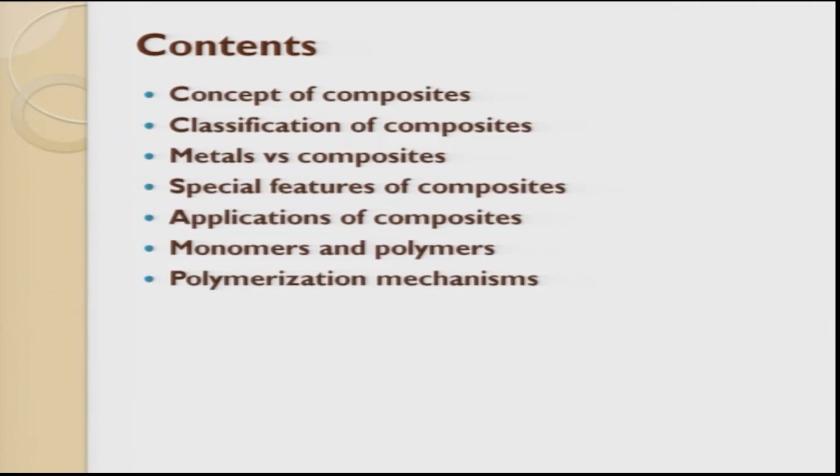So in today's lecture, what we are trying to cover is the concept of composites, then we will talk about classifications of composites, then the advantage of composites as compared to metals, special features of composites, applications of composites. Then we take exclusively polymer matrix composites, and we will talk about what is monomer, what is polymer, and the different mechanisms by which polymerization can happen.

So what is composite? Though composite is a term used for almost a century, still a clear definition has not been evolved. So based on my understanding and the literature available, I have put a very broad sense of definition of composites.

So in a broad sense, the term composite materials refers to a solid matter composed of more than one component, wherein those components are in separate phases.

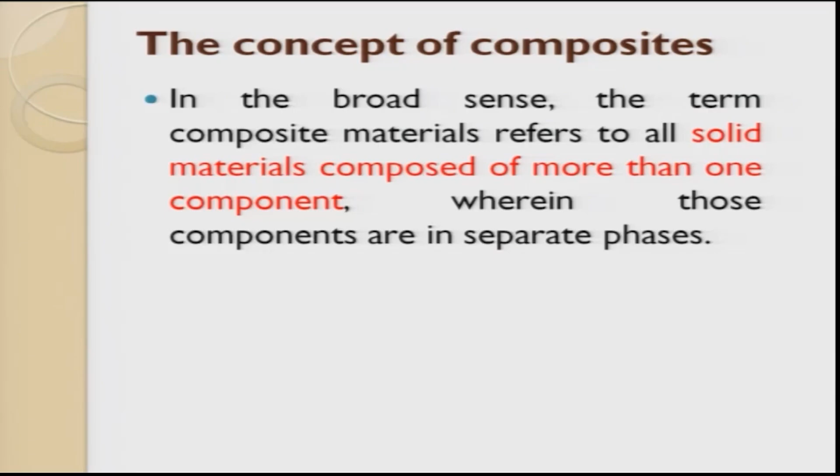So for example, I take material A and material B. When I mix these two and do a process, that means I apply pressure, temperature with respect to time, then I get a product out. This product will always be a synergy, meaning it will try to take the advantages of A, advantages of B, and give a new product which has the required material property.

And when I take the cross section of the composite material, I can still distinguish what component A is added and what component B is added. So this is a definition for composites. The component A is called the matrix and component B is called the reinforcement.

So there is a difference between composite and alloy. In an alloy, when I mix material A plus material B, it forms a product C. The product C formed will have a better property as per the customer's requirement, but when I take a cross section, I will not be individually able to detect the presence of material A and B. So this is the difference between composite and alloy.

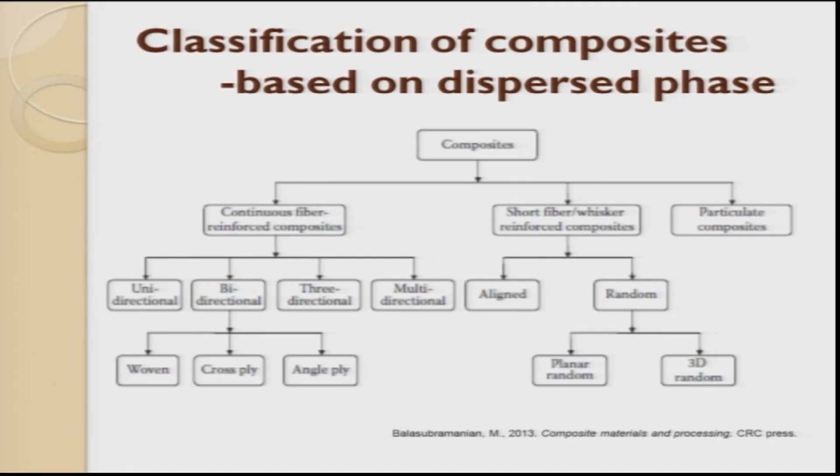When we go ahead with the continuous fiber reinforced composite, again you have unidirectional and bidirectional. Unidirectional means all the fibers running in one direction length. Bidirectional means it is woven like your cloth, a shirt what we wear. So you have fibers running in both directions. You can also have fibers running in a third direction.

These composites are now getting into the market and have very high strength, and these composites are called 3D composites. The fiber runs in all three directions so that you get X, Y and Z thickness also. Then you can also have multi-directional.

When you talk about short fibers, it can be aligned in one direction or it can be random in nature. When you go to bidirection, we call it as woven, and there is also a classification called cross ply. You can also have angle ply. Angle ply are these textile-like materials cut in different directions and they are laid.

We will see more in detail when we talk about composite laminates and other places. As far as random is concerned, it can be planar random or it can be 3D random.

When I talk about composites based on matrix classification, there are three types. One is called polymer matrix composite, which is very predominantly used in mankind today. The next one is metal matrix composite. Metal matrix composites are used wherein there is need for high strength materials and other properties like stiffness and corrosion resistance. All these things we are now trying to add to metal matrix composites.

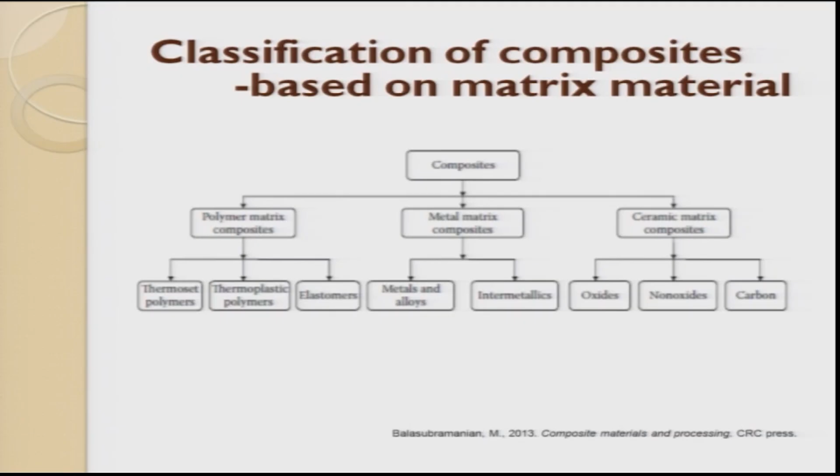When you talk about ceramics, there are three classifications: oxide ceramics, non-oxide ceramics, and carbon. When you talk about oxides, alumina and SiO2 are some examples. Here these ceramics are bonded together and sintered along with the reinforcement to get a toughness property. For non-oxides, examples are SiC, CBN, and WC, tungsten carbide.

And the last one is carbon, which is used as the matrix in which reinforcement happens. A very good example of carbon-carbon composite is used in radomes, which are in the front nose cone of a plane, where there is a huge amount of temperature, pressure, and friction as it comes down from very high altitudes to the ground level.

So this is the classification of composites based on matrix. First I talked about the dispersion phase, then I talked about the matrix phase. Now let us see some of the properties of composites when compared to metal.

I take only two metals, since these two are commonly used: steel and aluminium. If you see weight-wise, steel has a very high density, followed by aluminium. So aluminium is nowadays getting replaced wherever steel was used. Second, aluminium has the advantage of corrosion resistance. So aluminium is now playing a major role.

Now when we move towards composites, it is much lighter than even aluminium. So if you have a moving body and want better efficiency or mileage, then we replace that aluminium also with composite materials.

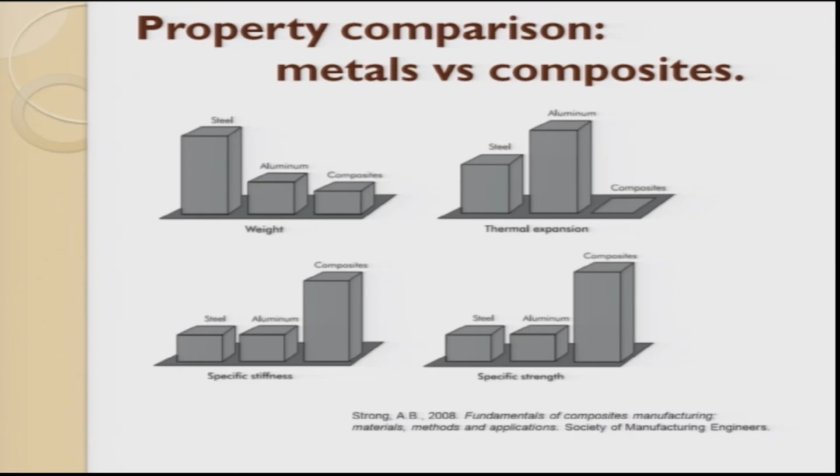With this, let us move further and see what are the special features of composites. Composite materials have high specific stiffness. What is high specific stiffness? Stiffness to density ratio, that is, stiffness divided by density. This gives an advantage in seeing what weight I have to add to get the required stiffness. The next one is with respect to strength.

Stiffness and strength are two different properties. Please make a note, people interchange these unknowingly. Stiffness is different, strength is different. Stiffness is taken in the elastic zone, while strength we always take as the ultimate strength.

The next one is that composites are materials which can be made up to near net shape. Today in manufacturing, the entire manufacturing domain or regime is moving towards near net shape machining or near net shape part making.

One example is rapid manufacturing or rapid prototyping, wherein the prototype or product is made exactly to the near net shape, and we do a final secondary operation, either painting or a finishing operation, such that we can directly take it to the market.

Near net shape is one of the biggest advantages of composites, and on top of it, composites give a wonderful property of getting integrated along with other parts. So the capability of part integration is very easy and good with composite materials.

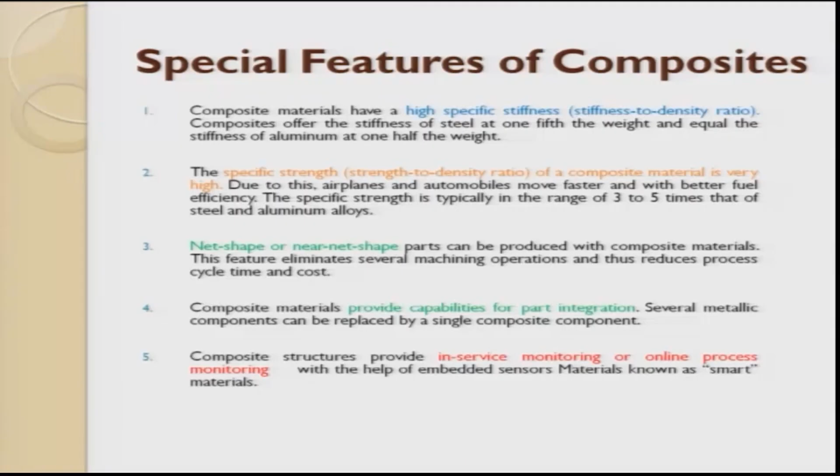The latest advancements in composite structures are in-service monitoring. For example, I make a composite bridge and embed a few sensors. These sensors will try to tell me what load is going on the bridge, plus it will also tell me the health of the composite which is put there. So today smart materials are embedded into composite materials, and we try to use it for in-service monitoring.

Now let us see some examples and application industries where composites are exhaustively used. It is used in transportation, for example in trains, cars, and buses, wherein in all three the performance gets enhanced. The biggest advantage is energy efficiency.

When today's world is talking about carbon footprint and pollution, composites are coming up in a way to help reduce pollution. The next one is engineering construction. I have given you the example of towers, and then in process industries and transmission industries.

Next, in aerospace industries, you can see commercial flights are becoming lighter and lighter. The biggest advantage is they don't have to stop over at different countries for refueling. They start from one destination and go to the other, or almost half of the globe, without any stoppage, because of the composite material added there.

In space shuttles, yes, very high temperatures, very high strength. Composite ceramic matrix composites are coming up in a big way.

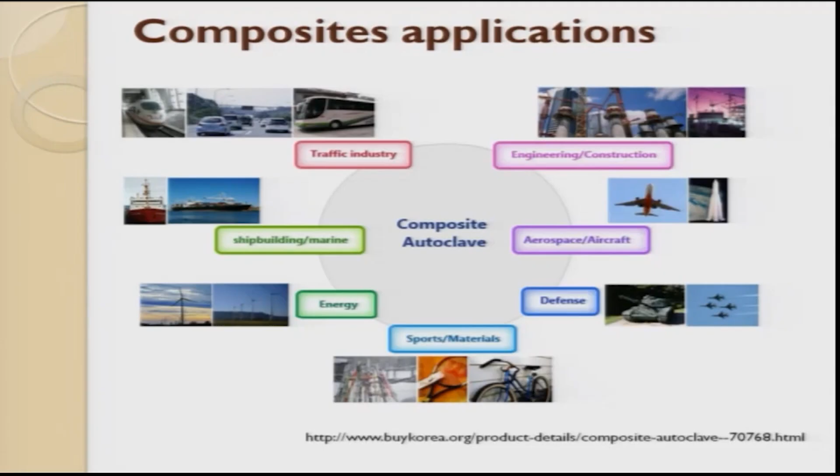Defense applications - today people are talking about bulletproof jackets and bulletproof helmets. Earlier the weight talked about was 15 kilos, 21 kilos. Today they are talking about around 3 kilos and 5 kilos, which gives a soldier a big boon to wear and use during operations.

Sports - the cycles have become very light. The cycles today are made out of carbon fiber composites, which they claim to be around 3 kilos. The entire cycle can be collapsed and taken to places.

People are also looking at sports materials - t-shirts coated with nanomaterials that perform very well and don't give you odor. Shoes are also made out of composite materials, predominantly elastomer composites and polymer matrix composites.

The next one is energy, wherein windmill blades are made out of polymer matrix composite. The biggest advantage is the shape of the blades can change today - it can stretch by few centimeters or millimeters. The diameter can change, the surface can change depending upon the wind.

The shipping industry is also one industry where there has been a lot of change from steel to polymer matrix composites.

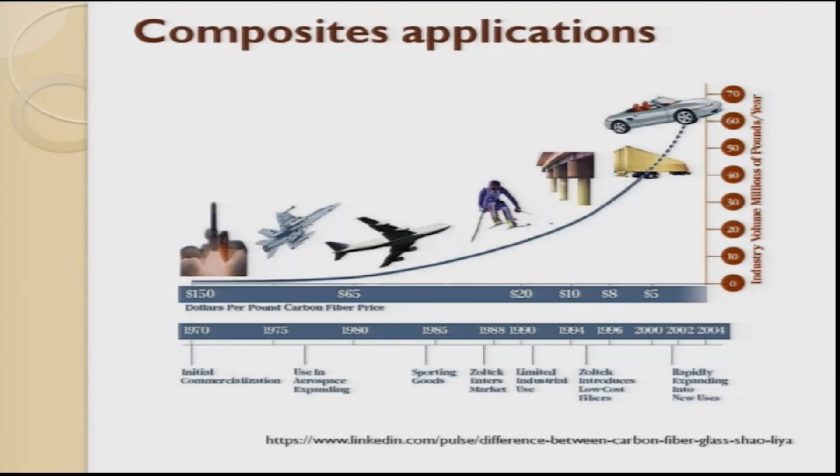This graph shows the year from 1970 to 2004 on the bottom. You can see the usage of composite materials in various industries has enhanced, and the amount of money invested in millions of pounds per year is shown in this graph. This is an old graph from 2004, and it keeps exponentially increasing even today for various applications.

When we take a commercial aeroplane, about 50% of the material is made out of composites. I'll repeat - it has very high strength to density, stiffness to density. It is made to near net shape, so I can give an aerodynamic profile very easily, and I can integrate with other parts very easily. So when I want to do part integration, composites come up in a very big way.

Today from 50% composites, people are now stretching themselves to go up to 75% made out of composites. Here I have different color codes - I am sure it is visible for you. People have started using carbon composites.

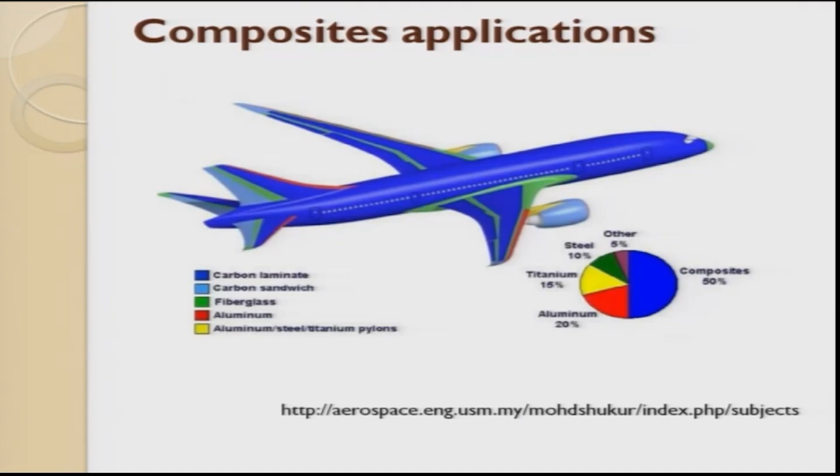People have started using carbon sandwich composite - we will see what sandwich is later - fiberglass, and they have also started using aluminium metal matrix composites. These are some of the parts which are made out of composites, for example CFRP.

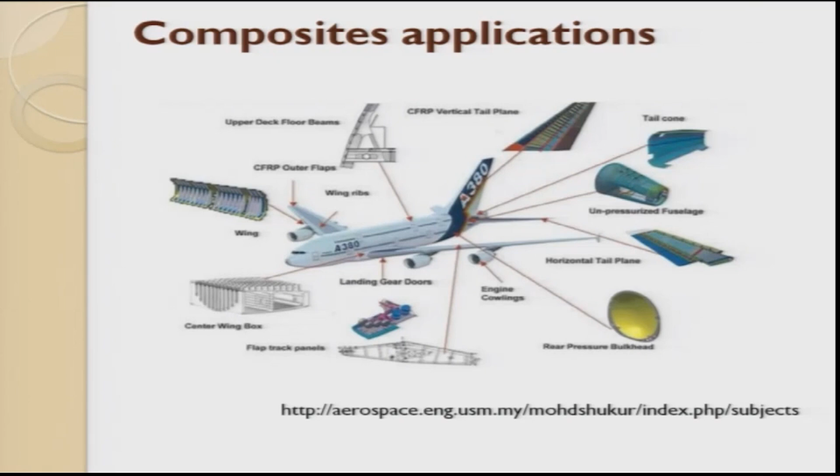Vertical tail planes are there, tail cones are made out of it, rear pressure bulkhead is made out of composites, engine cowling is made out of composites, wings are made out of composites, and center wing box is made out of composites.

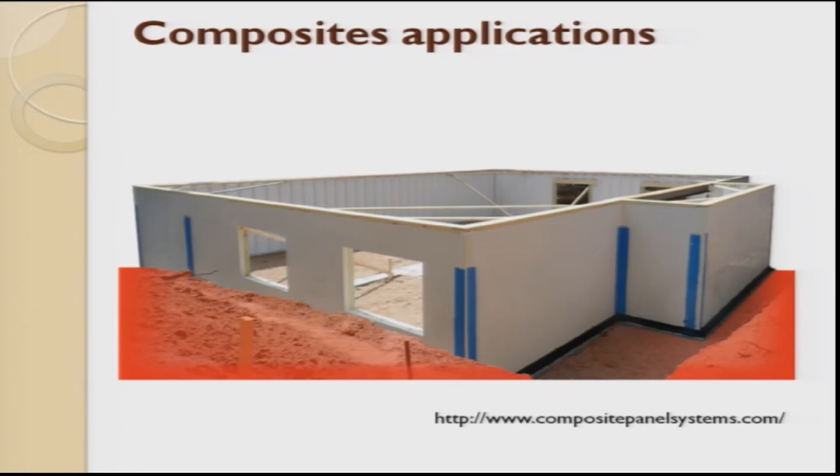Today, houses are made out of composite materials. These houses first came into existence for disaster management, but today rapid construction is required in third world countries. So the complete roof and the side panels are made out of polymer matrix composite, which is acoustic proof, plus it has part integration with steel fasteners, so you can quickly go assemble it at the required site, and it gives a big boon for the construction industries.

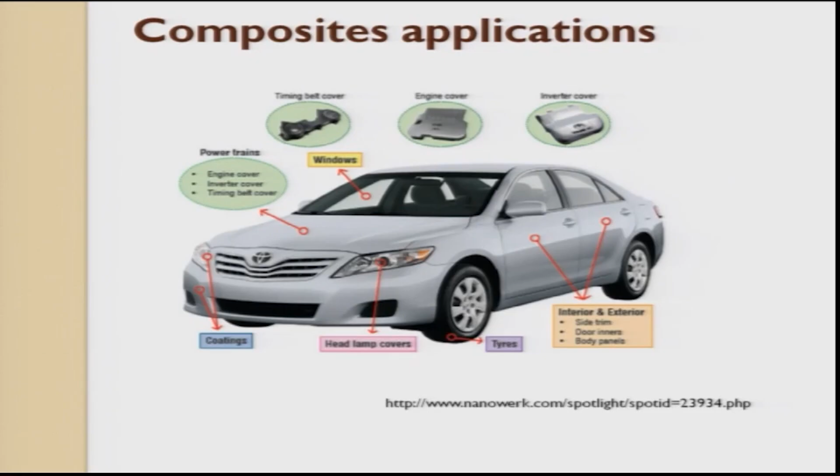Cars - as I told earlier, today in cars also there are a lot of parts which were earlier made out of alloys that are getting replaced by metal matrix composite materials, for making the car lighter, stiffer, and perform much higher.

Marine industry, where corrosion is a big problem. Here the superstructure, interior parts, cover, deck, bulkhead, hatches, hull, and transoms are all made out of polymer matrix composite. So again here, when you make composites, you have to look at two things.

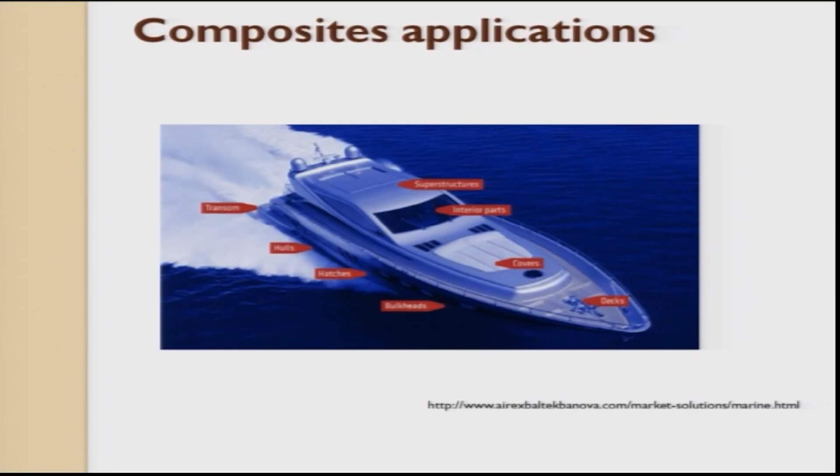One is called primary structure, another one is called secondary structure. Primary structures are structures which predominantly take load. Secondary structures are used for filling, for giving other secondary properties which are required for the product.

So when you take a marine application of composites, there are a lot of primary structures made out of polymer matrix composite as well as secondary structures made out of polymer matrix composite. A simple example for secondary structure is the deck, which is only a spacer used for the movement of human beings around.

As I was talking about defense, helmets have become much lighter, bulletproof jackets have become much lighter, but lighter and high performance. Inside a bullet jacket now ceramic tiles are used. These ceramic tiles are again a composite material which has very high toughness and very light weight, which helps the soldier perform efficiently without getting fatigued during operation.

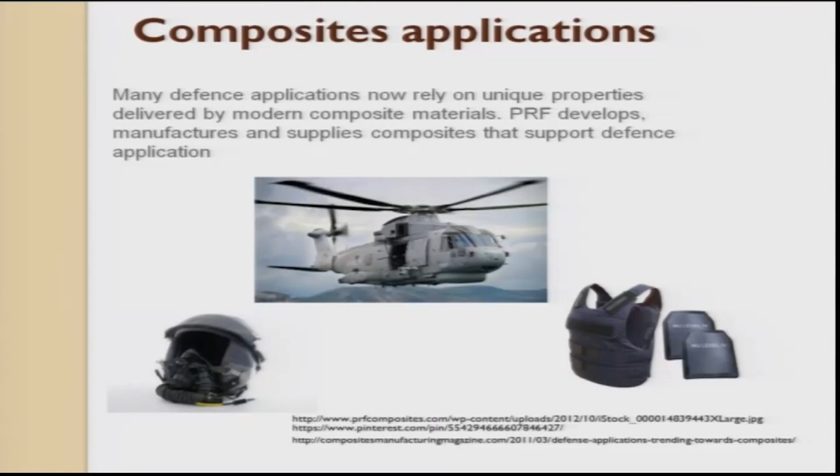The helicopters are made out of carbon fiber reinforced composites. The blades of a quadcopter or a helicopter are made out of lightweight materials so that it gives stiffness as well as less weight.

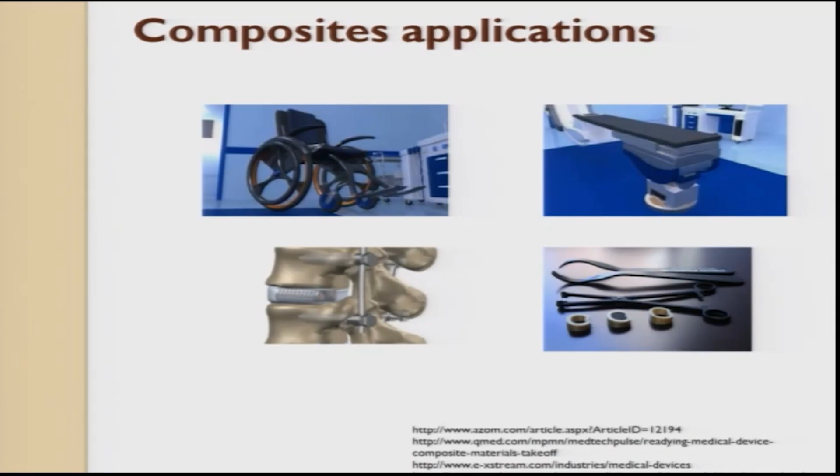In biomedical applications, there are a lot of products coming out which are made out of composites. Wheelchair is one, and you see a lot of appliances, fixtures and apparatus made out of metal matrix composite material, so that they perform high or perform good.

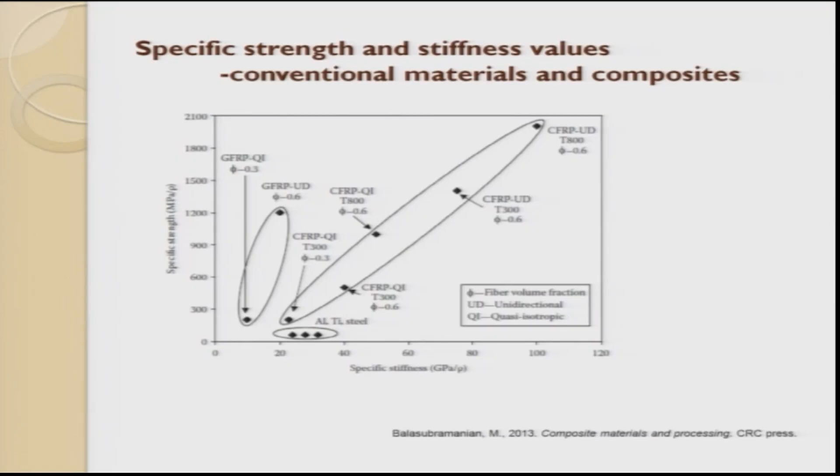You can choose and pick what is required depending upon your application. So you look at conventional materials - aluminum, titanium, steel - look at their specific strength to stiffness ratio, and look at carbon fiber reinforced plastics, unidirectional, for the strength versus stiffness value.

So now let's get into polymer. Polymer is otherwise called plastics, and when it is used for fabrication, it is called resin. The name polymer clearly tells that there are a lot of monomers joined together to form a polymer. So the matrix material can be polymer, metal or ceramics, but from now on for the next few lectures we will focus only on polymer matrix composite.

The terms plastics and resins are often used to refer to polymer matrix composite. The term polymer means many units are joined together and form a chain, and this chain-like structure is called polymer, and inside this polymer we try to add reinforcement and make a composite material.

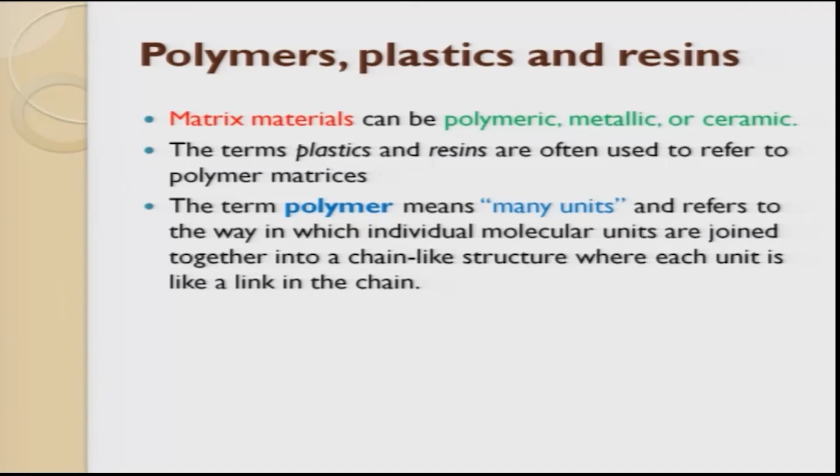called a polymer. A monomer is a single molecular unit that can be made into a polymer. So a monomer is made out of atoms and has a specific and consistent grouping. What is a polymer? Polymer molecules are nothing but several monomers linked together to form a polymer chain.

It is a single long chain. This single long chain alone cannot be used for applications. There will be several chains attached together, and they will be forming clusters, and this clustering of monomers into a chain fashion is called a polymer.

So there are two basic mechanisms involved in this polymerization process. One is called addition polymerization, the other one is called condensation polymerization. In addition polymerization, there are 5 steps involved.

So the 5 steps are: first, the free radicals are formed, then the formed free radicals try to bond with the monomer, and then this monomer tries to join with each other, they form a chain, and this chain keeps on further multiplying and growing, and this cannot keep growing for an infinite period. So there will be something called a termination step, so that it terminates the polymer.

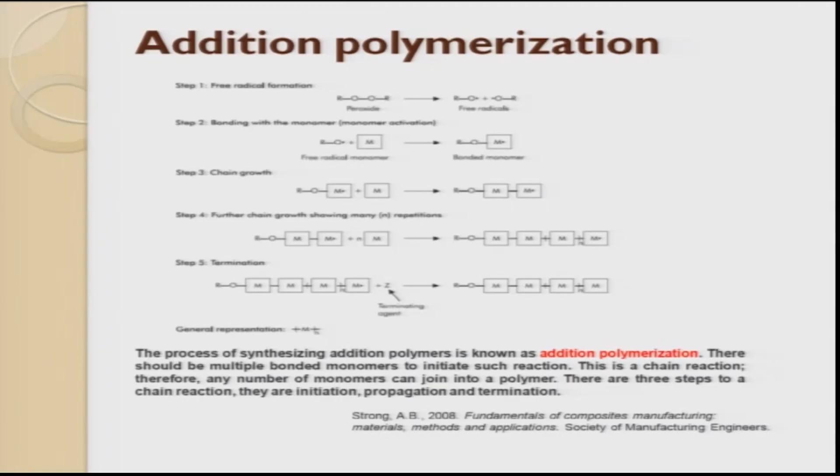If you want a simple analogy: I have a set of beads, and all these beads are there in a box. These beads have to be linked to each other. How do we link them? We apply an adhesive and stick all the beads together. The other way around is we use a twine which can pass through all the beads and form a chain. It is almost the same thing.

The radical is a peroxide which forms free radicals. These radicals get attached to the monomer, and monomer gets attached to monomer. Monomers get attached, and then finally they get terminated. This mechanism is called addition polymerization.

The next mechanism is condensation polymerization. In condensation polymerization, what happens? The monomer reacts to form a new molecule and a condensate. The condensate is predominantly nothing but water.

So you have this monomer joining with another monomer. When these monomers join together to form a link, they also form a condensate. So the reaction of an end of the link molecule with a new monomer happens, and this reaction with the new monomer keeps continuing, and finally it forms a chain.

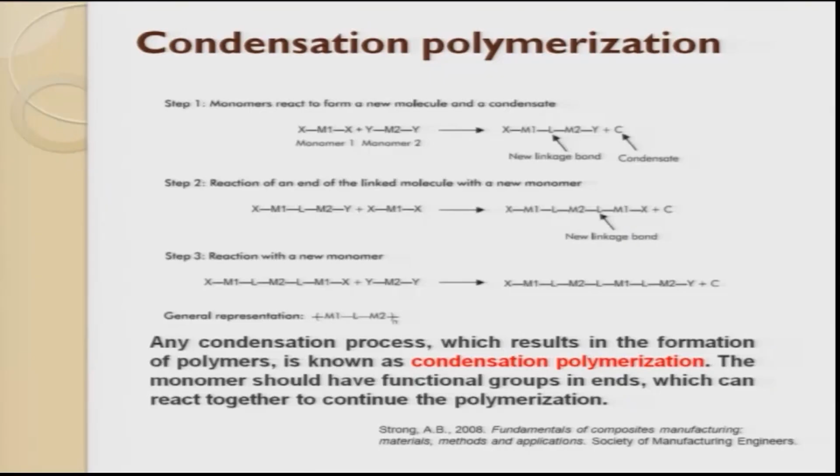Any condensation process which results in the formation of a polymer is called condensation polymerization. The monomer should have functional groups at the ends which can react together to continue the polymerization. So these are the two predominant mechanisms of polymerization happening such that a mer is converted into a polymer.

So now the polymer is ready. We will try to add reinforcement to make it into a composite.

So I would like to conclude today's lecture. In today's lecture, what we saw was what is a composite, what are the applications of composites, what are the properties of composites, and we saw different polymerization mechanisms such that how a mer is converted into a polymer. We saw only the major mechanisms.